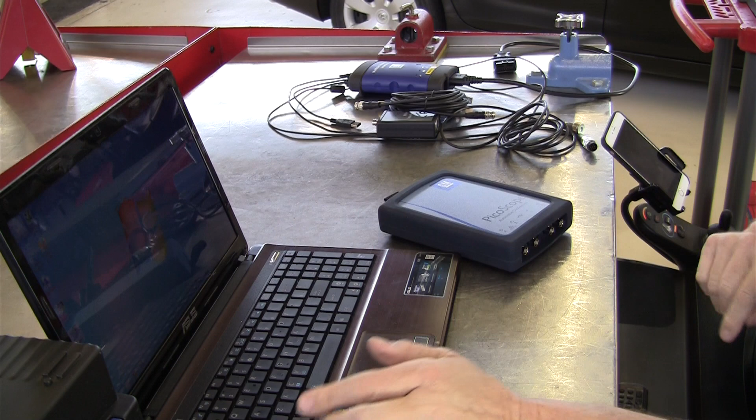Anyway, so for what we need to diagnose vibrations on a car in this kit, once again, we've got to have, and let me bring it over here, a laptop computer running Windows, and for the General Motors version of this, there's special General Motors software that you can download from the GM Dealer Solutions website, but you have to have a GM login to be able to do that.

I told you earlier that this kit could work on other vehicles, and PicoScope has some generic software. It is called Pico Automotive diagnostic software. If you go to their website, picoauto.com, you can download the software for free, and then even though this says GM, the same setup would work on another vehicle. Okay, so to get this working, we need the laptop. We need to have 2 USB ports at bare minimum. So we're going to take the USB cable that came with the kit.

We're going to plug it in to the PicoScope scope interface box here. So I'll plug that in to the laptop, and it has a driver that comes with the Pico software to enable the computer to read from the oscilloscope.

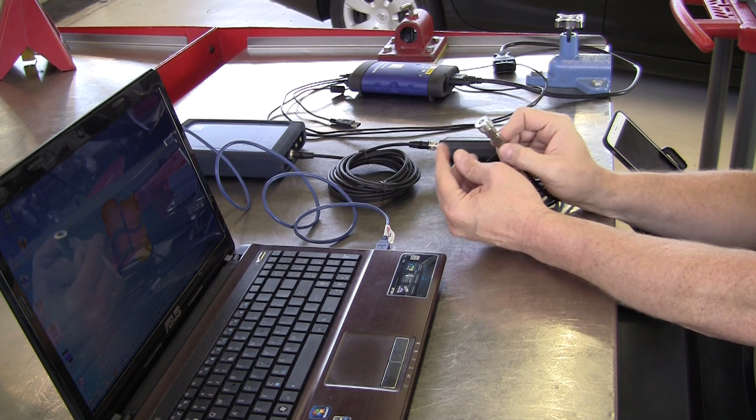Okay, so now this is the vibration analyzer, and in the first 3 episodes of this 5-part series on vibration analyzers, we looked at a Briggs & Stratton Sirometer, we looked at the Frahm resonant reed tachometer, we looked at the electronic vibration analyzer in the 4 different versions of that. This setup here from PicoScope does what all of those do. It measures vibration frequencies and amplitudes.

So this is a much more sensitive sensor than the EVA had. It's much more sensitive than the reed tachometer or the Sirometer. I really like this sensor. It's got a very strong magnet on it though, so whenever you stick it to something on the car, make sure you're hanging on to the housing here when you take it off rather than pulling on the cable, because I'm sure over time that's going to cause the cable to break loose.

Okay, so that's the vibration analyzer portion of the PicoScope kit, but that's not all. If you recall from the electronic vibration analyzer episode that I did, I told you that we needed vibration frequency and amplitude, but we also need engine RPM. And so what Pico has done is what I think is a very smart thing to do. They have configured their software to work with the J2534 data link connector interface. It's kind of a generic interface to communicate with onboard engine control modules.

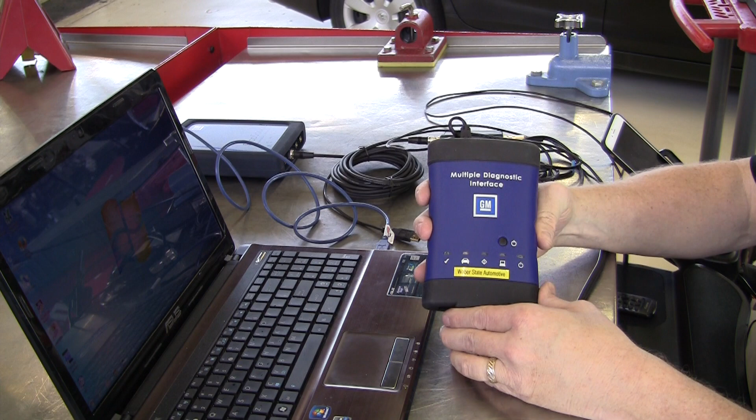And for General Motors, the interface that GM uses is called the MDI, the Multiple Diagnostic Interface. And the MDI simply has a long, skinny USB cable that I'm going to plug into the laptop. And then on the other end of the MDI, we have a 16-pin data link connector, and we're going to plug that into the car. And the PicoScope software will automatically communicate with the car, pull the VIN number, decide what engine it is and how to communicate with it, and read the engine RPM automatically.

Now the beauty of this is we've got the engine RPM, we've got the vibration frequency, and if you recall from the Vibrate software demonstration I showed you in the last half of the second episode, those are the two parameters we need to narrow down the group of rotating parts on the car that is responsible for the vibration that you're trying to diagnose. So I think they've done a really good job.

In episode 5, I'll show you the generic kit that they make for independent shops. Once again, this is a specific kit for General Motors, with General Motors specific software and help file and so on. And I'm sure they're working on packages for other automobile manufacturers too. But there's a generic package out there that would work with just about anybody's vehicle as long as it had the 16-pin data link connector and supported the J2534 communication interface.

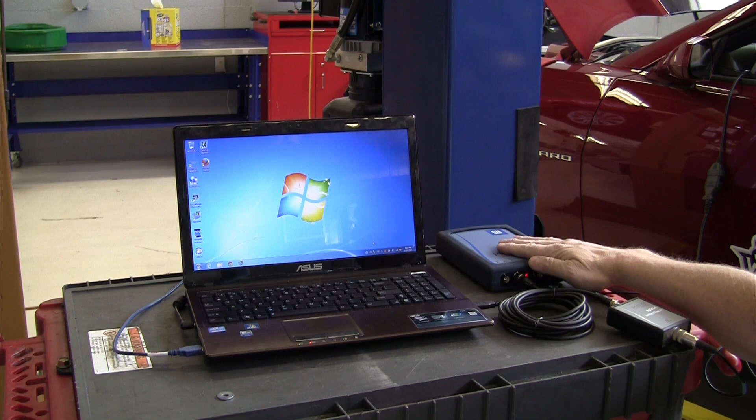And so, as I mentioned over at the other bench, we've got a USB connection that hooks the PicoScope oscilloscope box to the laptop, and then the scope lead cable that connects the NVH interface to the oscilloscope, and then the vibration sensor itself we've got mounted inside the car. Will you open the door? Let's look at where that sensor is.

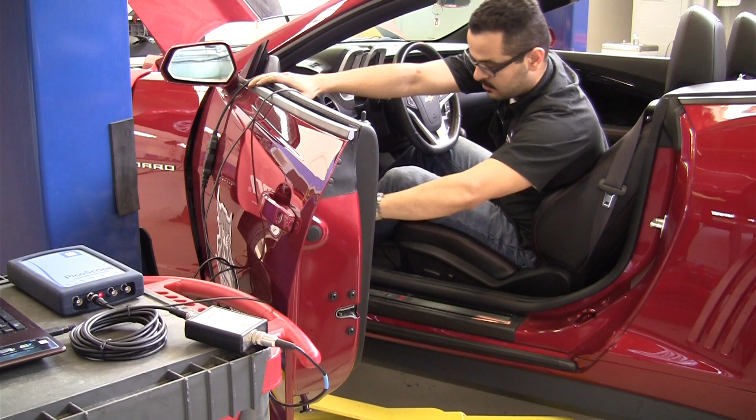So we've got it mounted on the seat frame right in front of the seat. Looks like we're not going to be able to see it very well, but anyway, it's right there in front of the seat on the steel seat frame. Go ahead and shut the door there. And we've got a good solid magnetic mount for the sensor. It just happens to be sitting in the vertical position, which is how PicoScope recommends that we connect it.

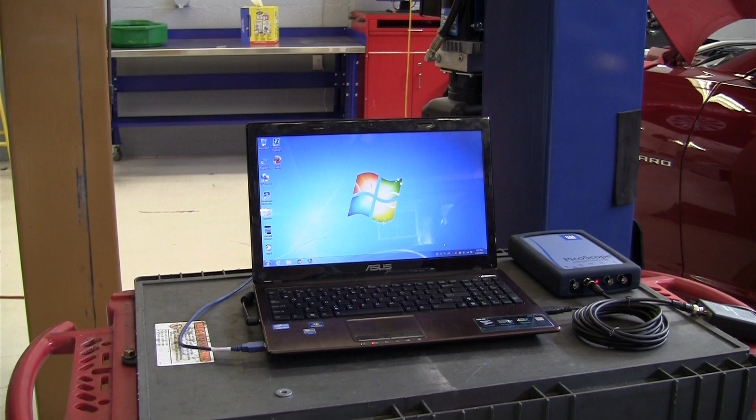And so now let's take a look at the software here on the computer. Okay, so I've just got a shortcut for the software right down here. I'm going to click on that. It's just labeled GM NVH. Brings up this screen here, and over here on the left hand side we have an option that reads NVH, or we have an option that reads balancing.

We're not going to do balancing in this episode. We'll do another one on balancing. So we're just going to go with NVH. So I'll click on that. And up pops the PicoScope NVH Analyzer Setup Wizard. And we're going to select Start a New Test.

We could also load a saved test if we had saved any previous diagnostic processes. And we could skip the wizard and just use the last settings. So if we'd already punched in this vehicle, it remembers the last vehicle, and we could go there to just instantly start again on the same car. But we're going to go with Start a New Test.

So when we start a new test, it brings up a window here, and it has engine RPM selection at the top here, and what it wants us to do is select one of three ways for the oscilloscope software, the PicoScope software, to determine engine RPM. One way is to use the data link connector. So right now it has selected the GM MDI or an approved J2534 device.

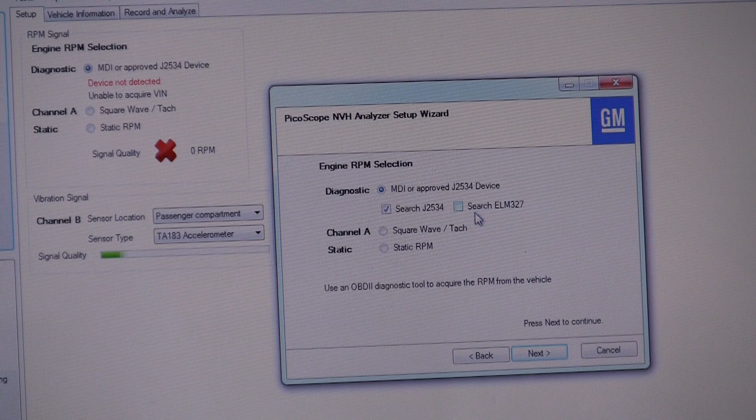J2534 is a Society of Automotive Engineers standard for data communication. So we're telling it to select or search the J2534 because the GM MDI supports that. We could also tell it to search for an ELM 327 interface. Now, let me zoom the camera out here just a little bit and show you. I have personally tried right on this same vehicle a couple of other interface methods besides the GM MDI.

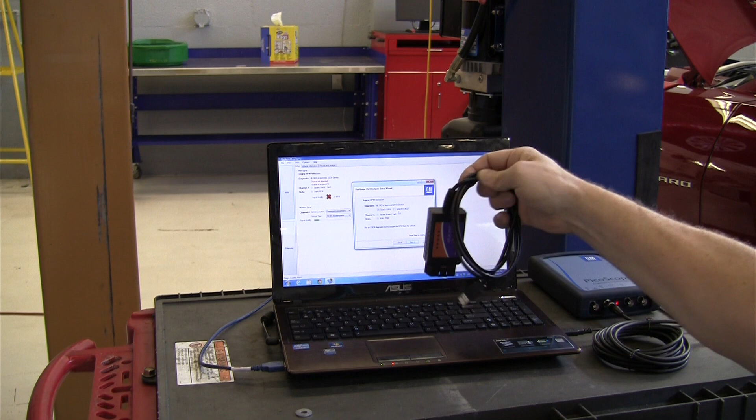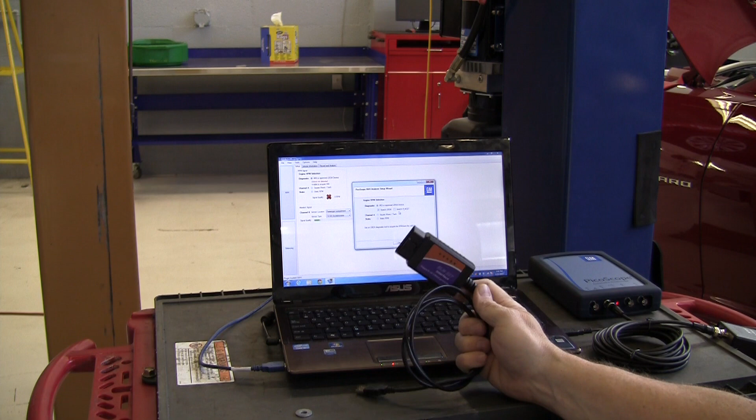Now there's a new MDI coming out. It's the MDI2, so the old MDI will become a little more plentiful, but it is a fairly expensive piece of equipment. I have here one that I just ordered off of the internet. I can't remember, I believe it was on Amazon, but this is an ELM 327 USB data link connector interface, and I believe it was around $30. The GM MDI is a lot more expensive than that, but the GM MDI does a whole lot more than this ELM will do, but the ELM will work for the NVH diagnostic.

So if you get an ELM USB interface, you can use that with the GM software, at least that I've found so far. Also, there's another company called Mongoose. This is the Mongoose Pro MFC from Drew Technologies, and it also works. Of course, both the ELM and the Mongoose, you have to install the USB drivers for them to work. But both of these I tried on this Camaro just before shooting this video, and they work just fine.

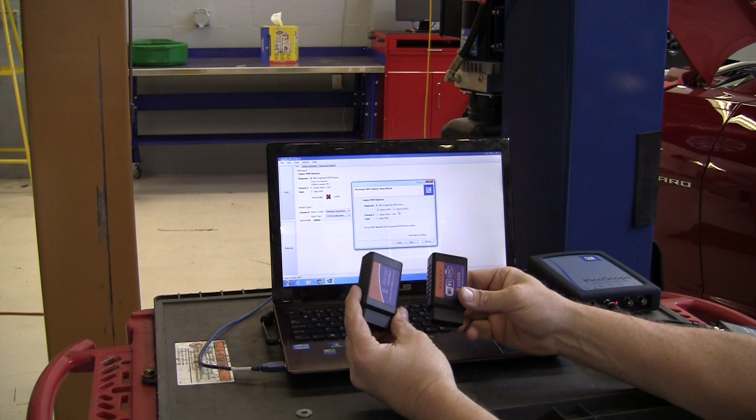What does not work, and don't get tricked into buying any of these, are the wireless interfaces that say ELM 327 on them. There's a Bluetooth interface one, there's a Wi-Fi interfaced one, and then there's a small newer version 2.1 Bluetooth interface. None of these work with the current PicoScope software. Who knows? They may in the future. That way there's no wire between the data link connector and the laptop while you're doing diagnosis, but none of these work at the moment.

So this is the GM software. We're supposed to use the GM MDI with it, which if you're at a dealership, you have at least one. But if you're doing NVH diagnosis and you don't have another MDI, rather than spending all that extra money on one, just get one of these less expensive ones. The Mongoose ones are around $400 or $500, somewhere in that range.

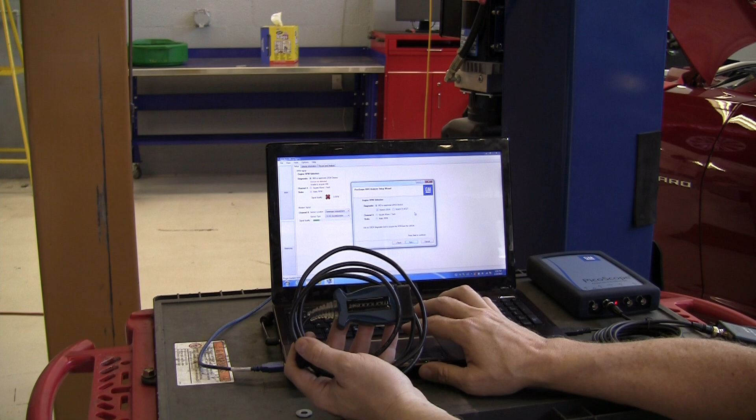And there's different Mongoose versions for different vehicle manufacturers that do more than just your generic J2534 communication. Okay, the other option is channel A. It says square wave tachometer. Some European cars, so if you're doing this in Europe, I forget which pin it is, maybe it's pin 1 of the data link connector over there with the diesel engines, is just simply a tachometer signal. And so you could pick it up there off of that.

Or there's another option here that says reads static, and that's static RPM, and that's to where you don't have to have an interface with the data link connector. You just simply punch in the engine RPM that the engine is at while the vibration is occurring, and it'll base its calculations on that. So we're going to hit next.

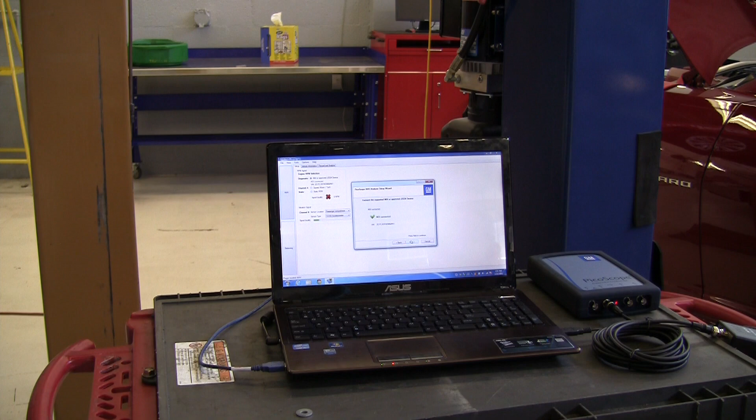It's going to try to connect with the MDI, and the MDI will try to connect with the vehicle. And let me zoom in so you can see what it says here. It says the MDI is connected. It's pulled the VIN number up for this particular vehicle, so I'm going to hit next. Now we have to tell it what type of engine. Is it a V-type engine or an inline engine, and how many cylinders? We need to know that because there are different types of normal vibrations for different configurations of engines.

And we need to determine if it's a normal vibration, then we have a powertrain mount problem, a motor mount, trans mount, exhaust mount that's transferring the vibration into the passenger compartment. If it's a non-normal vibration, then we try to fix the source of the vibration rather than fix the transfer path. So we'll hit next to continue. We want to know, is it rear-wheel drive, front-wheel drive, all-wheel drive, or four-wheel drive? We're going to go with rear-wheel drive on this Camaro.

We need to know the rear differential gear ratio. Now in a General Motors vehicle, that's the RPO code, the regular production option code. Typically on the Camaro it would begin with the letter G, but it could be an H, it could be an F also. But there's a 3-digit code that you look up on the car, on an RPO sticker, and then you compare that code to GM service information to get the gear ratio. And you enter that in here. This car is a 3.23. Luckily, it was printed right on a sticker on the bottom of the rear differential, so I lucked out on this one. So I'll hit next.

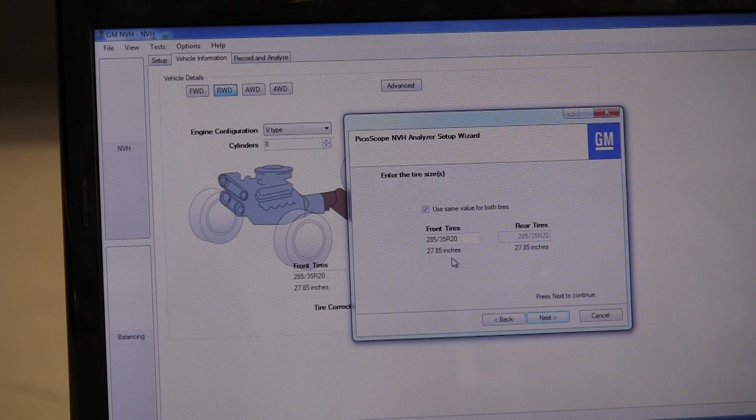Then they want us to enter the tire sizes. This car has 285/35R20. Actually, they're ZR20s, but it won't let you enter the Z. It just wants the R. And we're going to use the same value for both tires. So we'll hit next to continue. We want to know where the sensor is located. We have the passenger compartment or the engine compartment as an option, and which sensor.

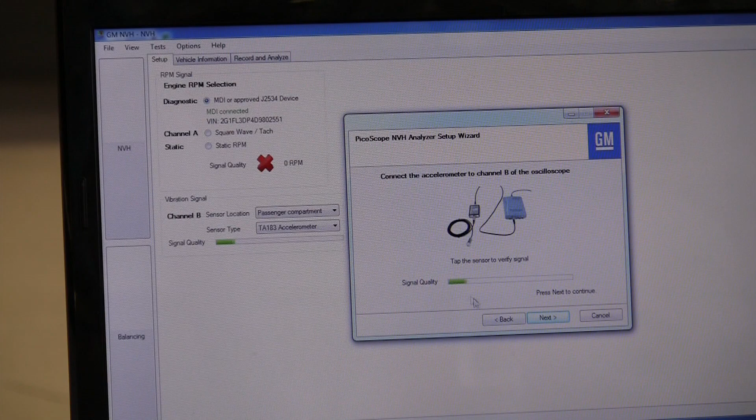It defaults to the TA183 sensor that comes with the PicoScope kit, but there are other sensors available also. So we'll hit next, and it tells us to connect the accelerometer to channel B of the oscilloscope. Tap on the sensor to verify the signal. We just kind of wiggle the sensor a little bit there, and as he bumped it, the spike went over. We're getting signal quality here. A signal. If there was no signal at all, then it's not connected. Maybe you've got a dead battery in the NVH interface box.

So we'll hit next. It tells us to attach the accelerometer in the upright position on the driver's seat rail. That's the best place for the sensor in my 20 years of vibration diagnosis experience. The thing you're trying to do is duplicate what the customer or the driver of the vehicle is complaining of, and it needs to be there in the passenger compartment. I have never found a vehicle that I could not find the source of the vibration with the sensor right there on the driver's seat rail.

The sensor location will affect the amplitude level, which is how hard it's shaking, and this software will measure the amplitude level, but the frequency will be the same, and it's really the frequency that we're matching to the different rotating components.

So we will hit next. It says you have completed the setup process and now can perform NVH tests. Click here for help on diagnosing the NVH faults.

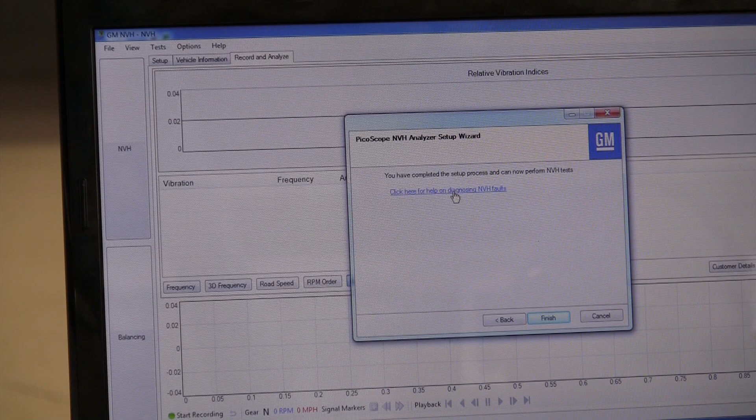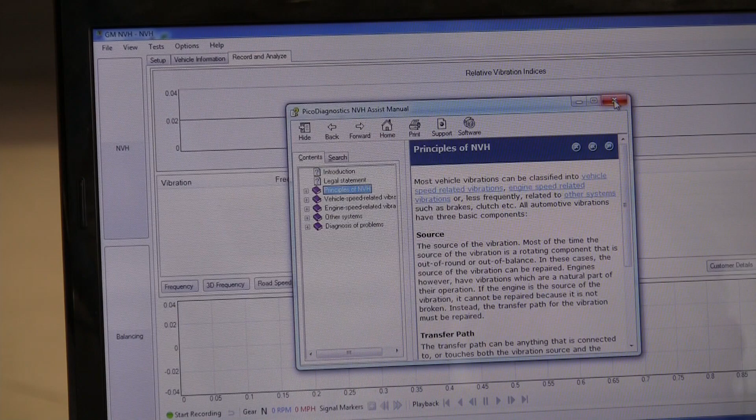If you need some help, you click on that and it opens up the PicoDiagnostics software help file for diagnostics, and it has all kinds of great step-by-step information in there on narrowing down the actual source of the vibration and repairing it. But you can't even do that yet until you figure out which group of rotating parts on the car is responsible for the vibration.

Typically there are three groups. You've got things that rotate the same speed as the engine, or rotate relative to engine speed, called engine speed related vibrations. There are components that spin the same speed as the tire and wheel assembly. And then you have things that spin the same speed as the propeller shaft. So those are the three main groups of parts that can cause a vibration on a vehicle.

There are electric motor driven components too, but those are a little easier to diagnose since you can turn those things on and off. Okay, so right now we're looking at the screen, nothing's going on.

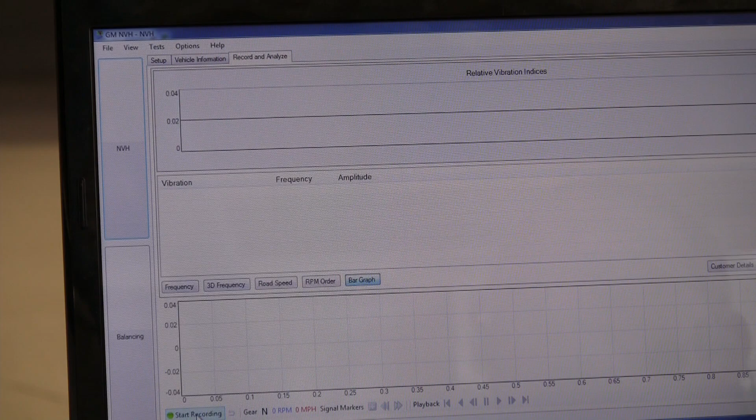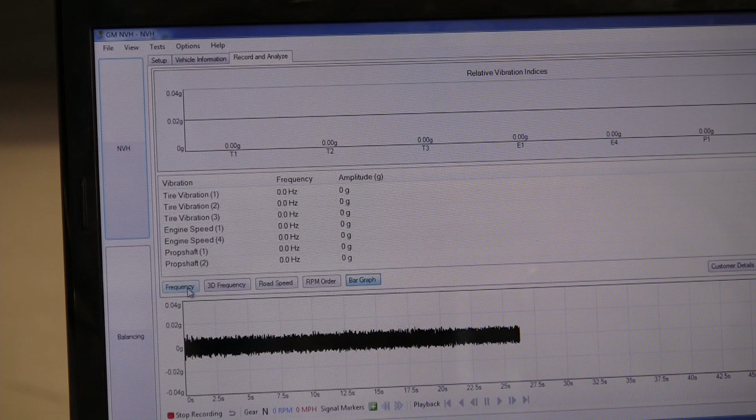We're going to hit start recording down here. We can click it with the mouse, or we can just hit the space bar to start recording. And we have several different options to display what the PicoScope software thinks is the source of the vibration on the vehicle. Right now we're looking at bar graph. Between bar graph and frequency, those two I think are the most helpful out of these five, and we're going to look at both of them.

So let's go ahead and start the engine and just let it idle. As you can see here on the screen, the blue line represents engine RPM, the black line represents the vibrations that the sensor is picking up. Now we're just in park with the engine idling. This is a brand new car, so we would hope there would be no abnormal vibrations.

Now let's look at the bar graph. There's barely anything going on up here. We have an E1, which is first order engine vibration, meaning there's 1 shake per revolution of the crankshaft. We also have an E4, which is 4 shakes per revolution of the crankshaft. Now E4 is one of those normal vibrations because it's an 8-cylinder engine, 4 cylinders fire per revolution of the crankshaft. So you've got the thrust of the power stroke pushing down on the crankshaft, and you get 4 pulsations per revolution, but it should be really low in amplitude, and this one is.

What they tell us in the GM specifications is we want to keep the vibration amplitude below 10 milli-g's, and the G here is a force of gravity. So we've got a tiny bit of E4 showing up, and that's because it's a normal vibration, but it's an extremely small amount of amplitude, well within specification. If this were a diesel, it would be a little higher because diesels have higher compression ratios and their pulsations are a little more severe.

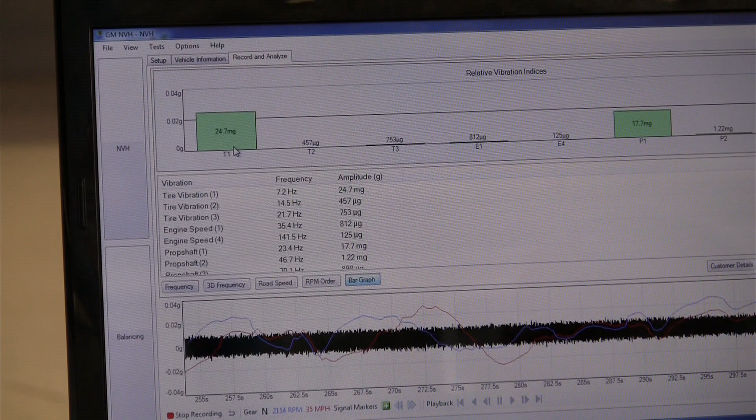Sometimes you've got to shift gears to get things working like they should, as far as we don't want the transmission upshifting and downshifting like crazy while you're driving.

Now notice right here on the screen we've got a T1 line at 24 millig's. I told you anything higher than 10 has got a problem. And over here we've got a P1 at 16. Okay, take it up to like 50 miles an hour now.

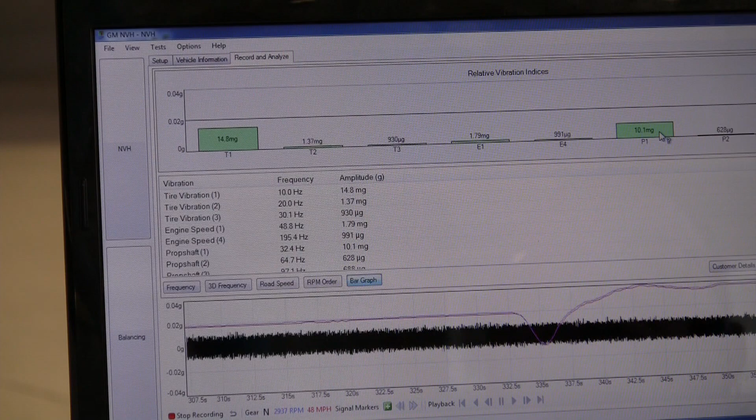So we've still got our tire at 16. We have our P1 at 12, 13. Notice everything else is pretty low, so we can ignore those.

So if we go to frequency, this shows us the amplitude level going up and down, and the frequency goes across the x-axis here at the bottom of the screen. And we've got the P1 amplitude, which is how hard it's shaking, right here, and the T1.

Okay, go ahead and let off on the gas. Just let it come down to an idle. But put the transmission in neutral. Okay, step on the brake. Put it in park.

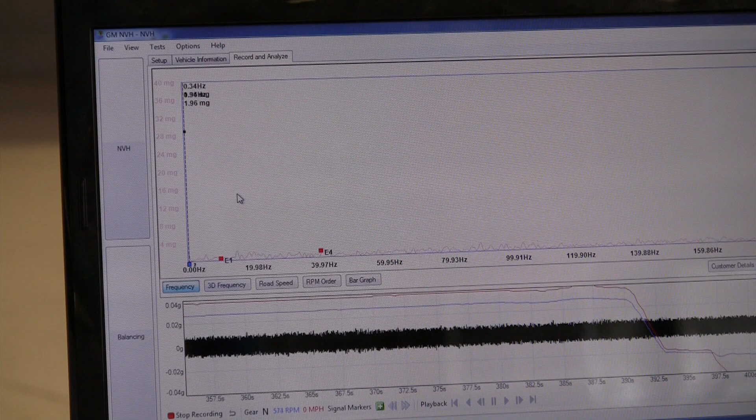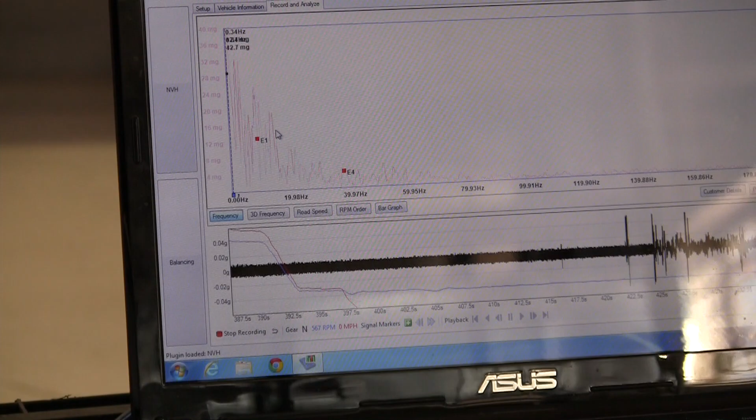Okay, now will you hop out and let's move the sensor up to the engine itself. I want to show you what happens with the... So, come on out, take the sensor with you. You can maybe just stick it to the hoist and go around, or find some place on the engine itself that you can attach that magnet to.

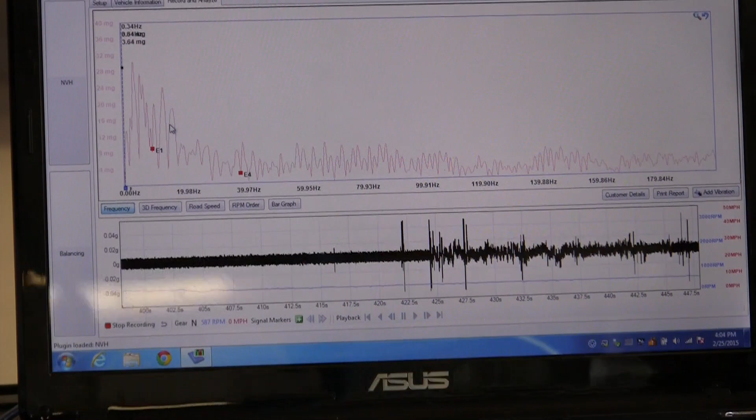So the screen goes crazy while he's trying to attach the magnet. Just a bolt or something. There we go, perfect. Okay, so now looking at the... let me get the reflection out of the way here.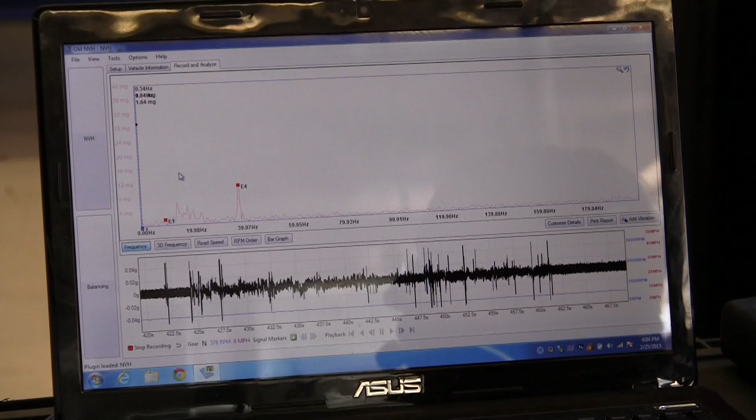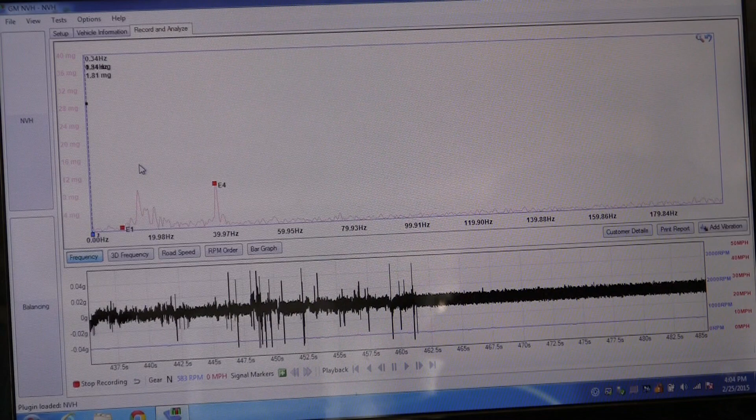Looking at the screen, we're picking up an E4 vibration, but that's on the engine side of the motor mount, and the engine side of the motor mount is supposed to have the E4. It's a normal vibration. If we go to the bar graph, the E4 should be fairly high. Notice it's right there bouncing off of 10, 11, jumping around millig's. So that's a normal vibration to have on the engine.

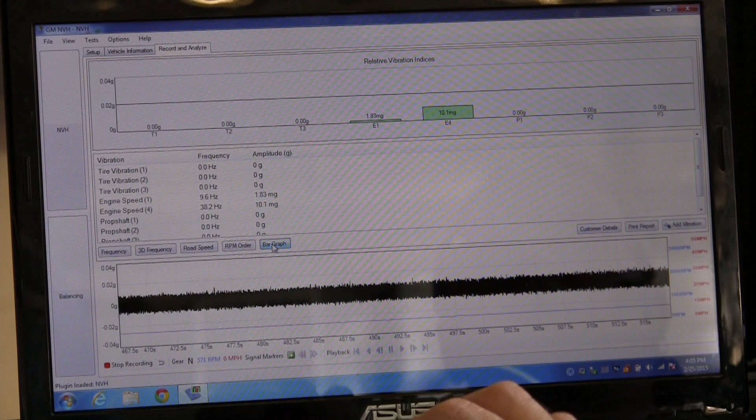Now, can I get you to move the sensor just over to the fender, the inner fender or the radiator support, so that we're off the engine now? And let's watch that go away. What you can do with the sensor is check your motor mounts to see if they're working like they should. Check your transmission mount, your body mounts, exhaust mounts. There, now he's got it on the radiator support.

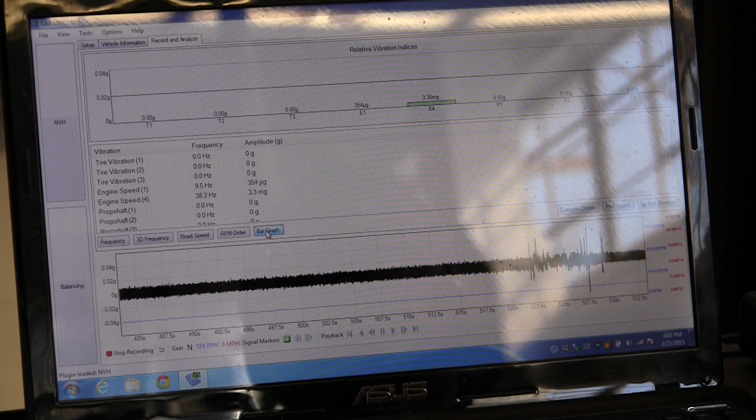Notice we're clear down to 4, 3, 2, bounce around a little bit, millig's. Sorry about the reflection there. And it appears the engine mounts are doing what they're supposed to do.

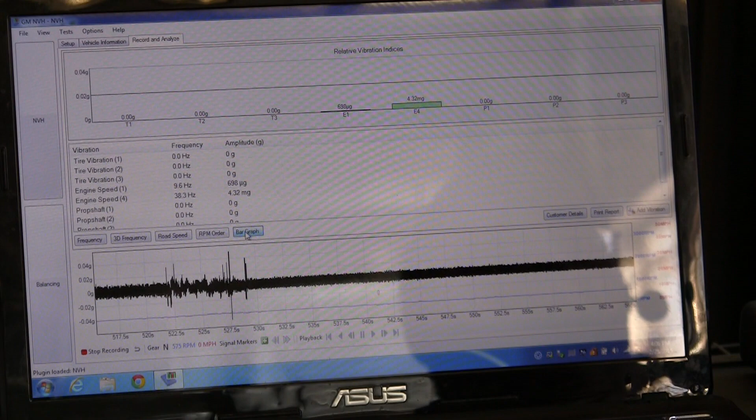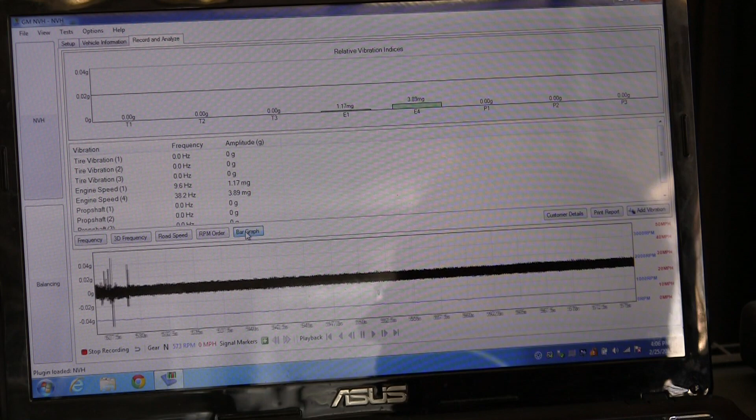So this is a fantastic vibration analyzer package. We're picking up the engine RPM off of the data link connector through the J2534 interface. We have an NVH sensor that we can move around with a very long set of cords that we can move just about anywhere on the vehicle.

And the frequency over here with the amplitude level, we've got an E4 over here, the E1. We've got a spike right here, but notice that doesn't have anything labeled with it. And it could be, and most likely is, a vibration that we ignore. It might, actually it looks like it's double of the E4. It's probably the E8.

But sometimes all of those vibration analyzers, and I haven't investigated this one yet, will give you frequencies that don't correspond to any rotating parts on the vehicle. In that case, I would suggest that you just ignore them and go with what the number one vibration is that is identified as one of the rotating parts on the vehicle.

Now there's a vibration over here that I mentioned, where we added the third or fourth order. No, what did we add? We added third order prop shaft. Let me put eighth order engine in there. See, it's not eighth order engine because eighth order engine would be over here. So it's just something we're going to ignore, and that's fairly common.

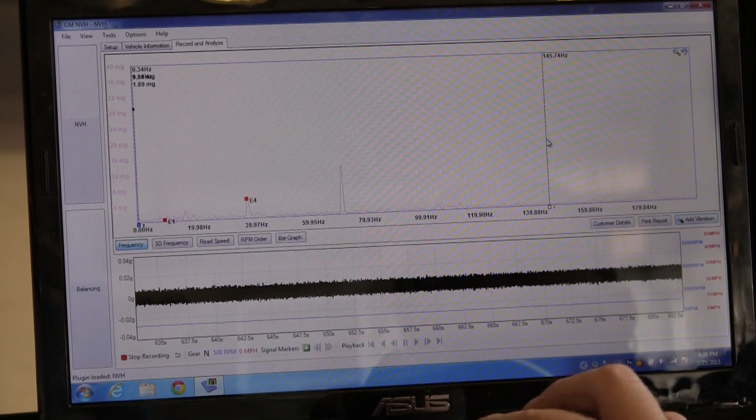Well, this has been a demonstration of the General Motors PicoScope NVH kit and how to use it to diagnose which group of rotating parts on the car. Will you go ahead and turn the key, or turn the engine off, but then turn the key back on?

So... thank you, that's all I need.

The next thing you do, same as with any other vibration analyzer, is once you've narrowed it down to first, second, or third order, tire, engine, or whatever—if you recall, order means how many shakes per revolution that device is creating. So first order is one shake per revolution.

T1 is one shake per revolution of the tire. T2 is two shakes per revolution of the tire. T3 is three shakes per revolution of the tire.

We've got E1 and E4, which are engine first and fourth order vibrations. And we've got P1, P2, and P3, which are propeller shaft vibrations, first, second, and third order.

On this vehicle, I put some extra washers on the propeller shaft bolt at the pinion flange to make it out of balance. On one of the tires, I put some extra adhesive weights to cause a vibration.

On the hoist, since this is a limited slip differential, both rear tires turn at the same speed, so it worked okay on the hoist to do it this way.

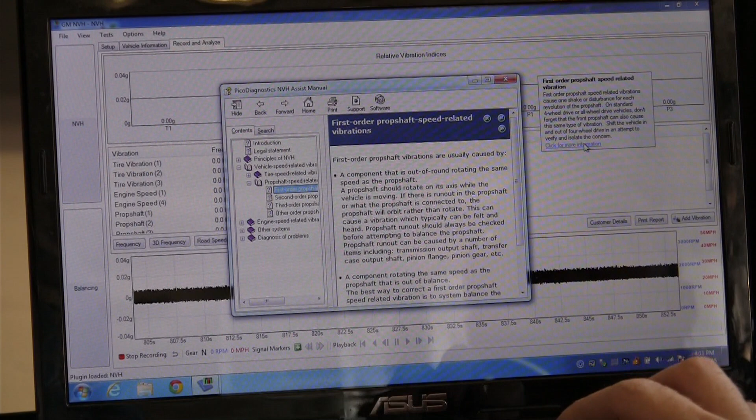When you click here for more information, it brings up the Pico software help file for first order prop shaft vibrations, and it tells you what those vibrations are typically caused by.

It's caused by a component that's out of round, rotating the same speed as the prop shaft, or a component that's out of balance.

And it has step-by-step procedures for you to diagnose this.

This refers you to the GM service information to measure propeller shaft runout, and also to refer to the GM service information for checking imbalance.

And this software provides tools to do a strobe balance on a propeller shaft.

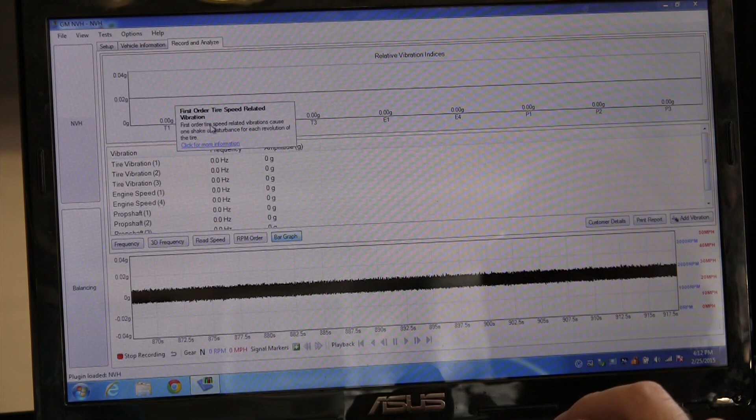So if it's a T1 vibration like we had, we click on T1, and it tells us first order tire speed related vibrations cause one shake or disturbance for each revolution of the tire. Click here for more information.

Up comes the Pico software help file for first order tire speed related vibrations, and it gives you a number of things to check. In this version of the help file, you go back to the GM service information and follow the step-by-step procedures.

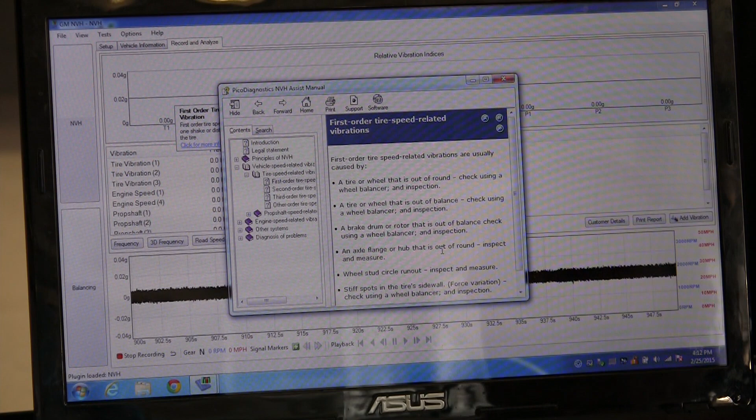You follow the GM service information procedures for measuring a tire that's out of round, a tire that's out of balance, a brake drum or rotor that might be out of balance, an axle flange or hub that's out of round.

Also check wheel stud circle runout, stiff spots in the sidewall, radial force or lateral force variation problems, or drive axle problems. Those are the things you check that can cause this type of vibration.

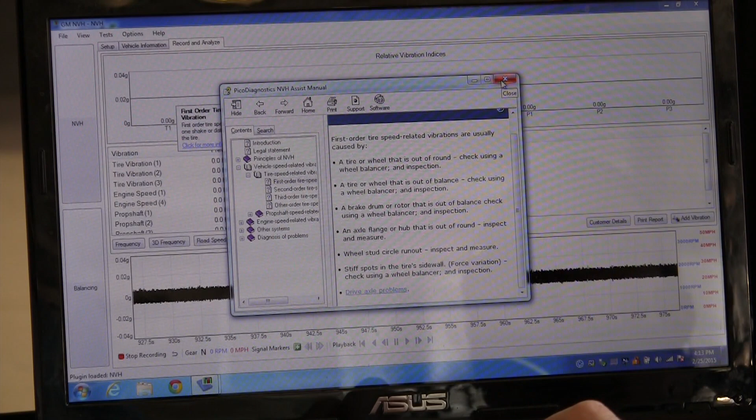So with this software, once again—the NVH Analyzer and the interface with the data link connector—we can narrow down the group of rotating parts on the vehicle, and then look at the help file for step-by-step procedures.

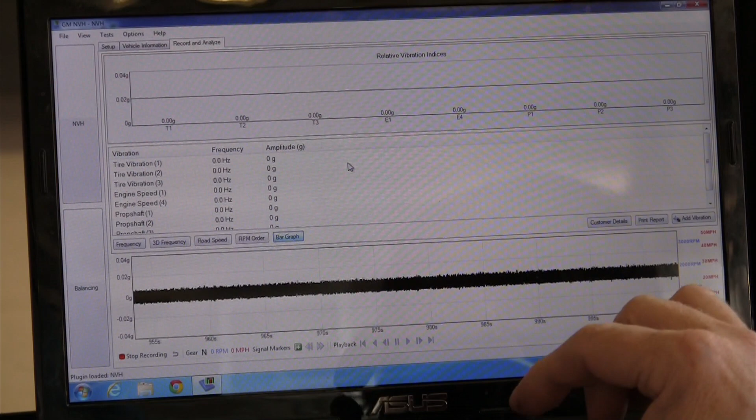Those procedures show where to go and how to diagnose each individual thing, and they're listed from most likely cause to least likely cause. So this is, I believe, a very impressive tool.

As I said before, it can work on non-GM vehicles, but you will need the non-GM software, which you can download for free from PicoScope's diagnostic website, and then it'll work on any vehicle.